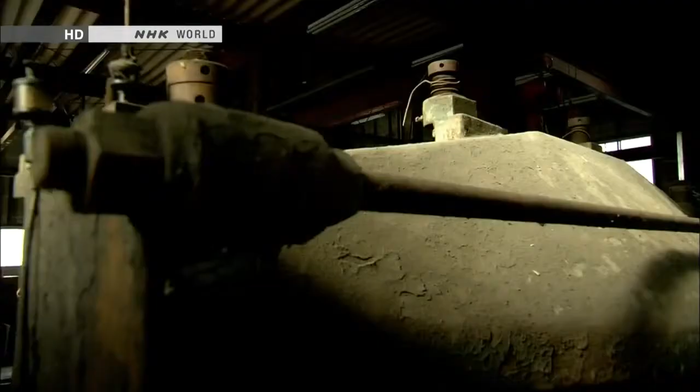The future is just around the corner. In a workshop near Mount Fuji, a curious being has appeared. It's 3.8 meters tall and weighs 4 tons. It is a giant humanoid robot named Kuratas.

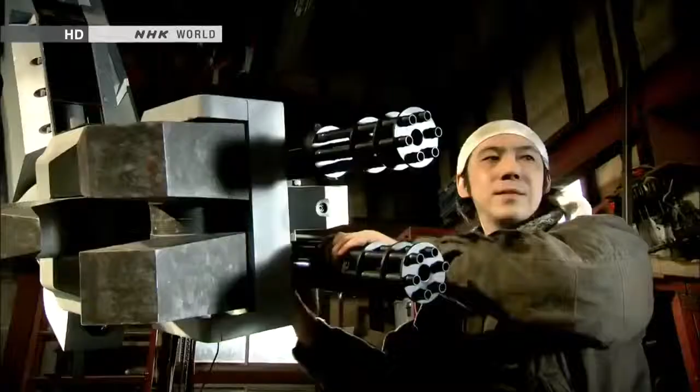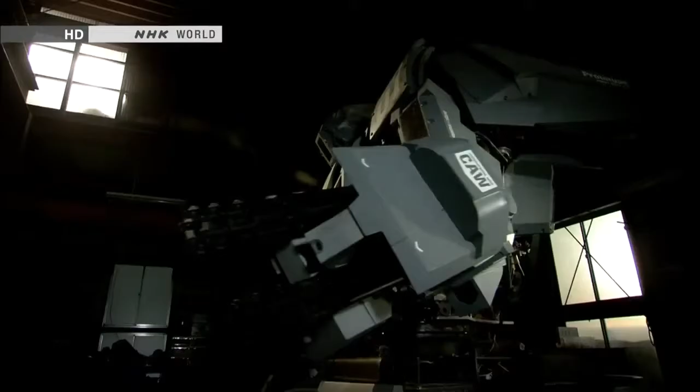Kuratas is a contemporary artist's creation. He holed up here for 2 years, building the robot with input from an expert. He calls Kuratas a work of art, but it's a sophisticated piece of machinery. A person seated inside can control the robot, move its limbs, and grab things. The artist says he was inspired by robots in science fiction tales and animation. That vision sustained him as he worked in solitude.

Things that were once unthinkable are becoming real. How will robots evolve? Well, military applications could be one option. They'll probably become more and more like humans. They could surpass us in strength and ability.

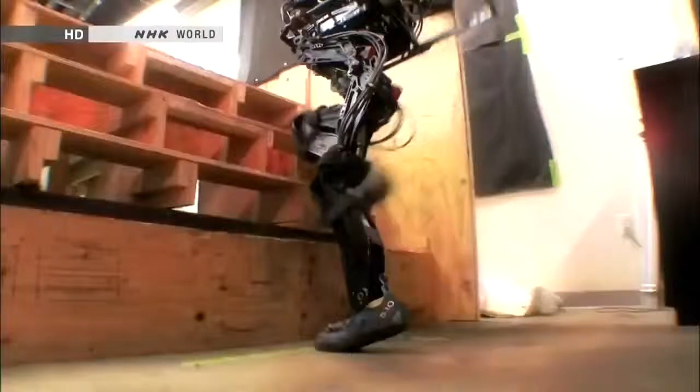People long dreamed of creating these extreme machines. Now, humanoid robots are here. They think like we do, move like we do, and even sacrifice themselves for us.

We want our robot to change society, because robots must be useful. Electronics and computing, progress in vision systems, there are many pieces of it. We will see much more capability continue to grow.

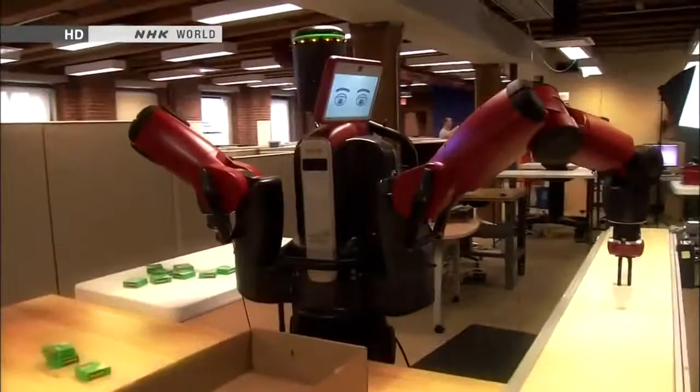Since the Industrial Revolution, people have entrusted some jobs to machines. But there may come a day when humanoid robots do much more complex jobs. Then what will people do? You'll see more and more robots doing things in society, whether it's manufacturing, service applications, or home healthcare applications. The key will be to skillfully divide labor between humans and humanoid robots.

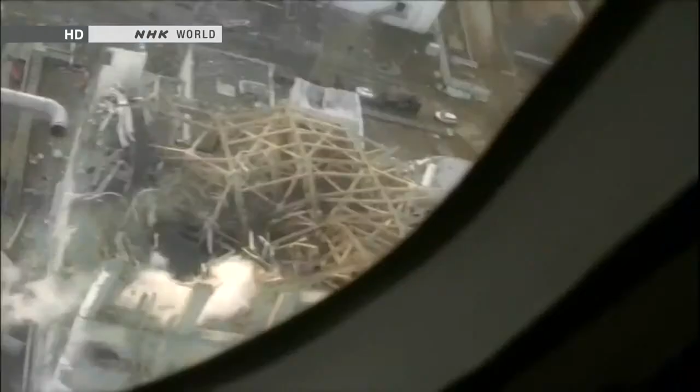The disaster that hit Japan in March 2011 accelerated efforts to develop robots with human traits. The Fukushima nuclear accident left people powerless. Robots can take over when things become dangerous. They can plow through rubble, climb ladders, even make repairs. People are turning to humanoid robots to handle all of these tasks.

We're eager to launch it soon to end the crisis. By joining forces, we can make a truly useful contribution. Only a humanoid could do it. The day will come when robots will really assist mankind.

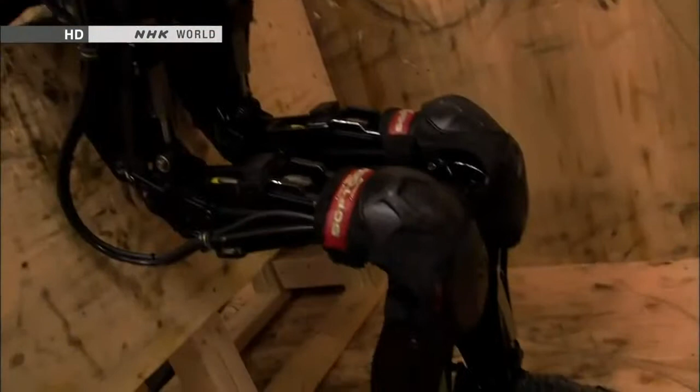The nuclear disaster in Japan sparked explosive advances in humanoids at the front line of robotics development. This program explores the future that's fast approaching.

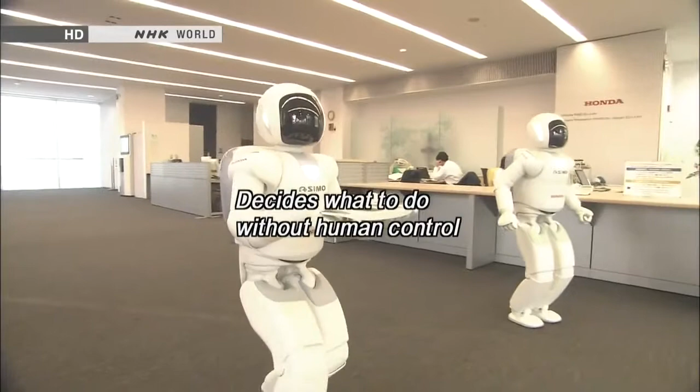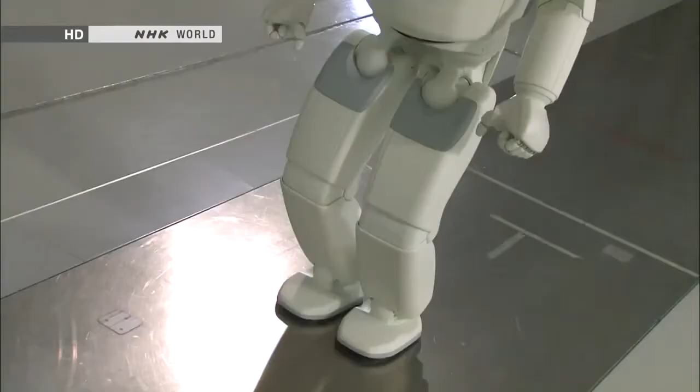Asimo was created by Honda's research and development subsidiary. We were allowed to film their top-secret robotics laboratory. Japan is a worldwide leader in the development of humanoid robots. Asimo is the country's crowning achievement. Engineers continue to make improvements.

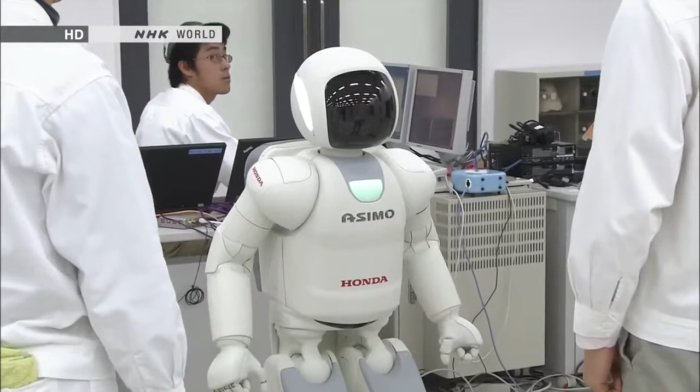Asimo's most innovative feature is its advanced intelligence. The robot can think and act on its own without human intervention. That's made possible by sensors that replicate our 5 senses.

Asimo's head contains 8 microphones. It uses them to listen and engage in conversation.

2 cameras work as eyes. They can detect humans and use stored data to identify them.

A facial recognition program. I don't think so. Please cover your face.

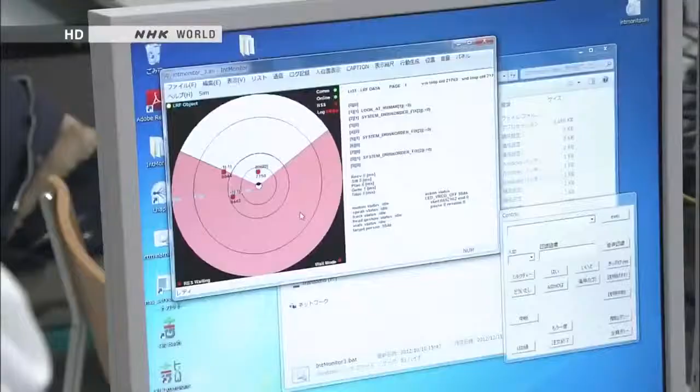Asimo's artificial intelligence analyzes a vast array of information. That's how it understands people's requests and takes appropriate actions.

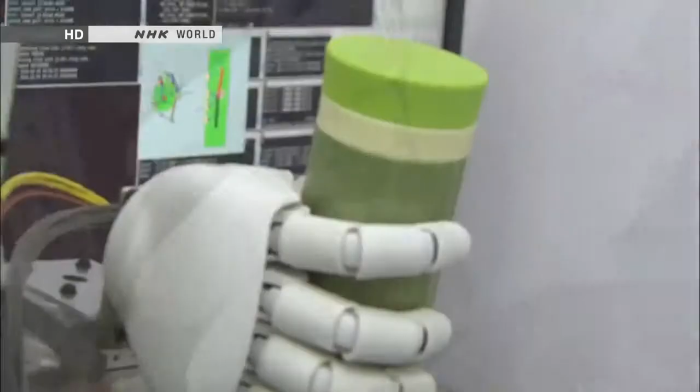Asimo also has a sophisticated sense of touch. Its fingers can make subtle movements, like a person's. Sensors are embedded in the fingertips, too. They can gauge the hardness of an object, like human fingers do.

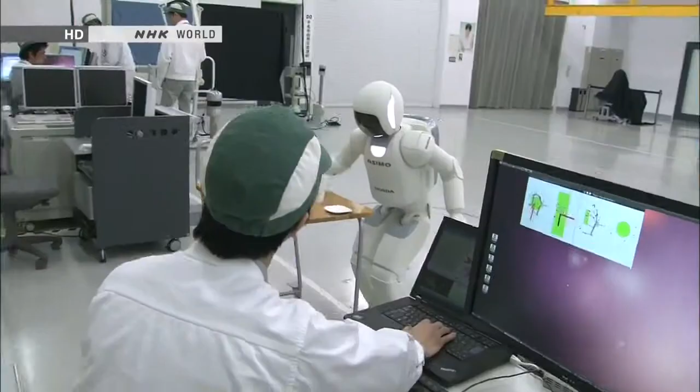Most robots use a fixed amount of strength to grab things. But Asimo exerts more power to open a tightly sealed water bottle and less when holding a paper cup. Its artificial intelligence uses information from the fingertip sensors to adjust the grip.

The developer's ultimate goal is for Asimo to be a valuable partner that coexists with humans.

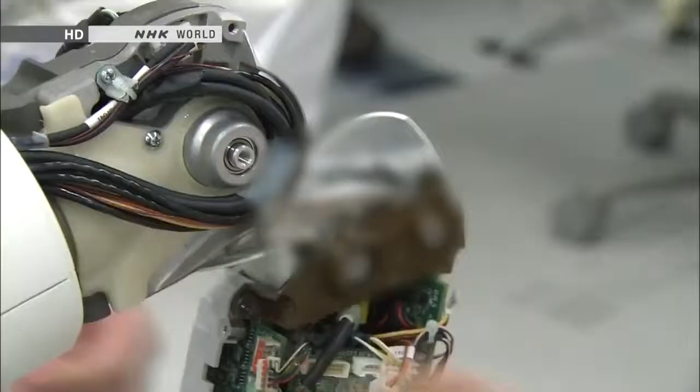The engineers who created Asimo all grew up watching animated shows about robots, such as Astro Boy, Doraemon, and Gundam. They dreamed of someday making their own. Satoshi Shigemi is the development team's leader. He has been designing robots for the past 16 years.

From the beginning, we wanted to design a robot that could help people. To realize that dream, we're constantly asking ourselves, what kind of robot would be able to change society, make people happy, and make life easier for people around the world? Our idea is to create a robot that will change how people live. We're working through the technological issues, one by one, in order to reach that goal.

Asimo's advanced physical capabilities are revolutionary. The robot can walk and run. It can reach speeds of up to 9 kilometers an hour.

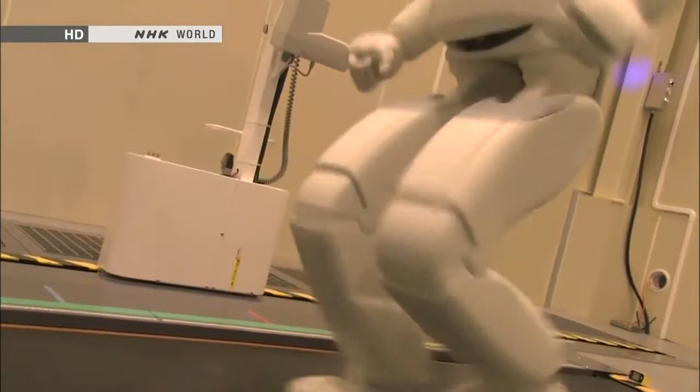For robots, walking is much easier than running. When running, both feet momentarily leave the ground. Balancing in mid-air is no easy task.

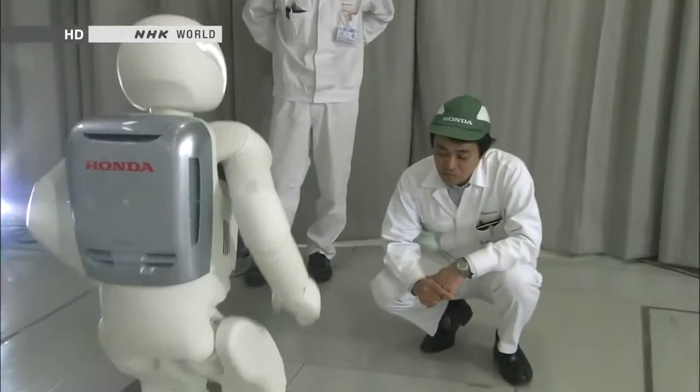Maintaining posture while jumping or floating in the air was a major technological breakthrough. Asimo leans its upper body slightly forward to maintain overall balance. It goes forward straight in the air.

Sensors in Asimo's waist measure the robot's angle. It leans slightly to compensate, forward or back, side to side. That's how it stays perfectly balanced in the air.

Asimo has been evolving ever since development began in 1986, much like a growing child. But something happened that made researchers realize Asimo's real-world limitations.

It was the accident at Tokyo Electric Power Company's Fukushima Daiichi nuclear plant. The damaged reactors released radioactive substances, making it difficult for humans to deal with the crisis. People needed something that could confront the dangers and bring the plant under control.

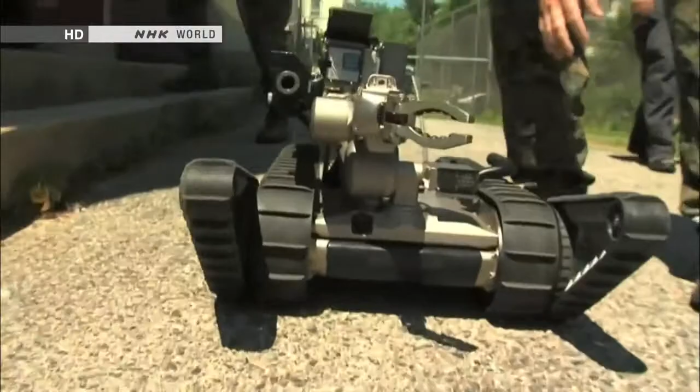Robots. Japanese officials sent a request for robots developed by the US military. The robots were sent to Fukushima in April 2011. They recorded images inside the damaged reactors.

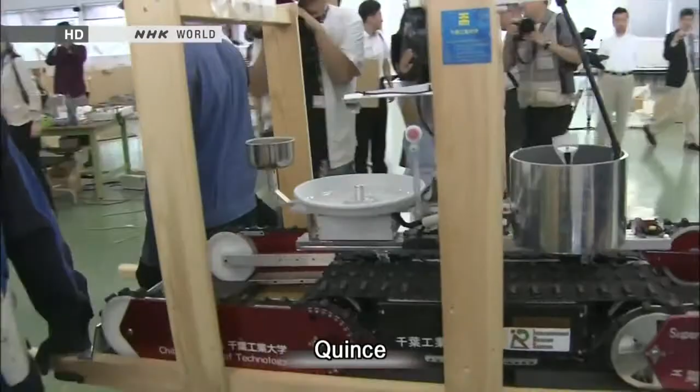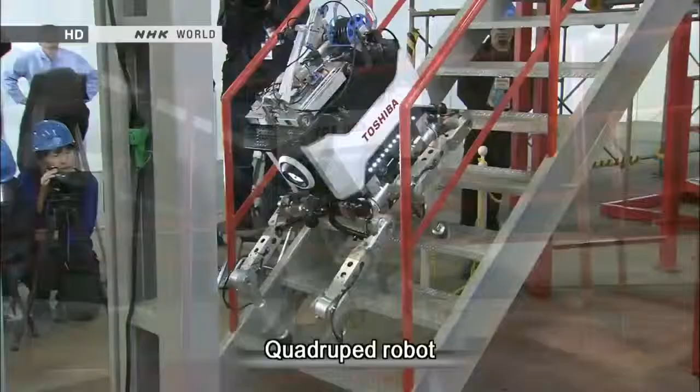Since then, a variety of Japanese robots have been enlisted as well. Robots have proven to be useful, but 2 years after the accident, they're only used for inspections. They're not able to do all the work of humans.

What about Asimo? Right after the disaster, people flooded Honda with phone calls and emails asking the company to send Asimo to the Fukushima plant.

But Asimo wasn't up to the task. It could move nimbly over an office floor and other flat surfaces, but large vertical gaps and obstacles were a different story.

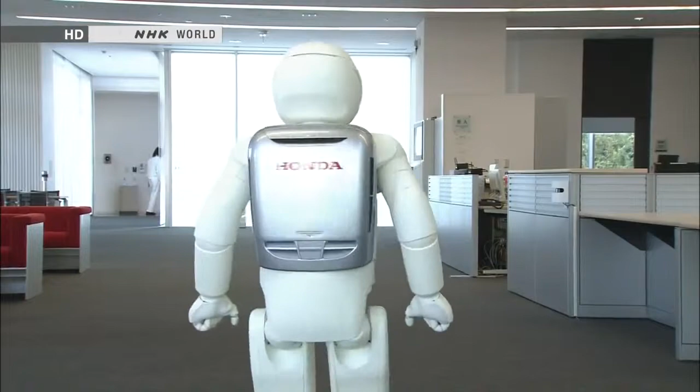We heard from many customers. We ourselves regretted that Asimo couldn't be of help. It was obvious that the Asimo we had built wasn't ready for real-life action. We realized right away that we needed to make something different. Something new that could offer immediate assistance.

Honda wasted no time. Company officials offered to create a robot free of charge to assist TEPCO in the recovery. TEPCO accepted. Officials asked for a robot that could open or close valves inside the nuclear plant.

We wanted to flush out radioactive materials that remained inside the pipes and bring down radiation levels in the facility. That was our first goal. Unless we opened or closed the valves, the area would remain highly radioactive, and that would prevent workers from entering the facility, and impact the entire decommissioning schedule.

How many valves are there? Each unit has from several thousand to tens of thousands of them.

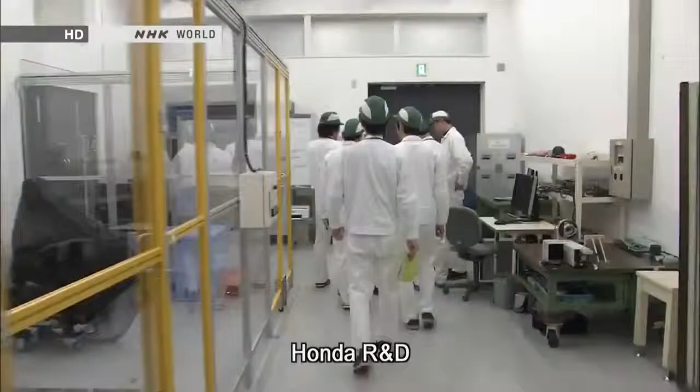In July 2011, 4 months after the accident, Honda began designing a robot for use at the nuclear plant. Members of the Asimo team were put in charge of the project. A humanoid robot would take too long to build, so engineers focused on making a robot specifically for operating valves.

Asimo was crucial to their efforts. Its ankles employ advanced balancing technology. Developers reasoned that using it would allow the new robot to work inside rubble-filled reactor buildings.

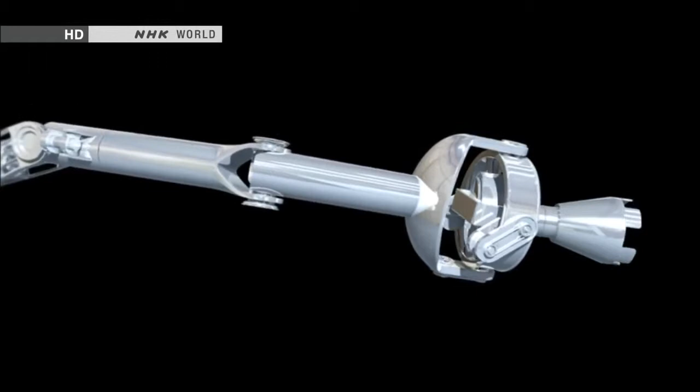The team worked exceptionally fast, completing a prototype in just 4 months. They turned Asimo's leg into an arm for operating the valves. Even when the base moves, the arm remains steady. So far, so good.

Officials from TEPCO evaluated the prototype at the National Institute of Advanced Industrial Science and Technology. The government-backed group for cutting-edge research contributed to the development effort.

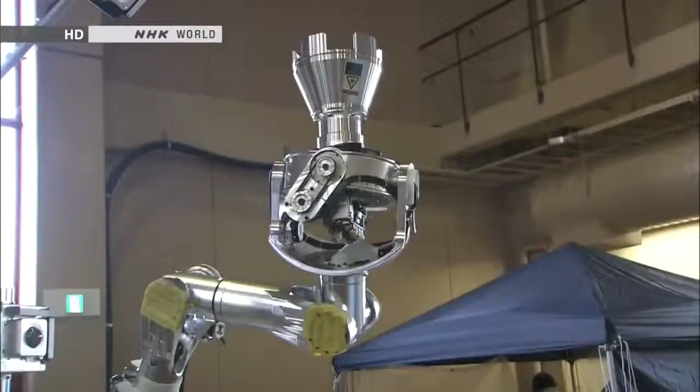A TEPCO official couldn't take his eyes off the robot's movements. We may be quite demanding. That's okay. We might be quite direct. The test is designed to replicate conditions inside the nuclear plant.

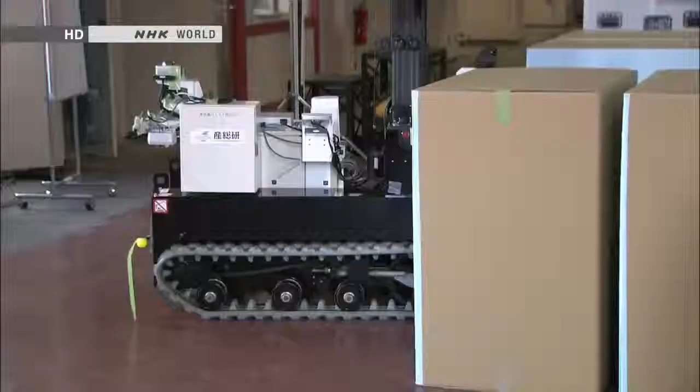The robotic arm is remote controlled. Testers send the arm toward one of the valves. There are a number of unknowns, including the condition of the valves. They may have rusted since the accident. A valve might break if the robot applies too much force, or it might not budge at all.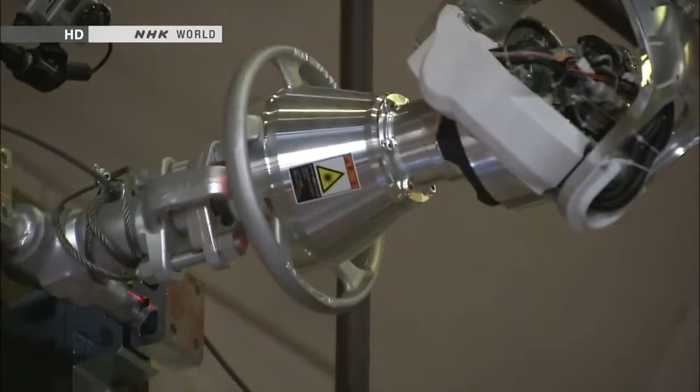The robot uses just the right amount of force and turns the valve on the first try. It's passed the test. This robot can do more than inspections. It could help in the recovery effort.

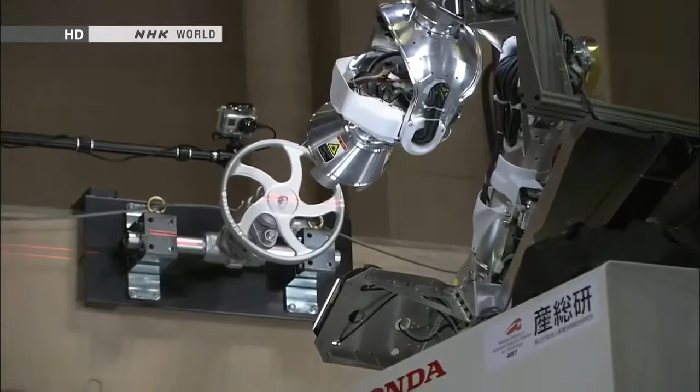From what we've seen, the robot seems near perfect. We want to use it as soon as the need arises. It's important that we quickly do what we can to make that possible.

The Fukushima accident also encouraged U.S. developers to design emergency response robots. Department of Defense officials have spearheaded the effort. Before, they had shown little interest in humanoid robots. Now, they view them as vital for disaster response.

The architect of the new strategy is Gill Pratt of DARPA. He oversees funding for leading-edge research at the Department of Defense.

There are many aspects of disaster response in Fukushima that inspire people in robotics to work on new capabilities. If they were able to take action during those first 24 hours, then the first reactor maybe would not have blown up in an environment that is too dangerous for a person to do.

What's important to us is that the robot is compatible with human environments, compatible with human tools, and also compatible with human operators without special training. As a result of that, the easiest form that comes to mind is the human form. DARPA is backing the development of a humanoid robot for catastrophes, such as nuclear power plant accidents.

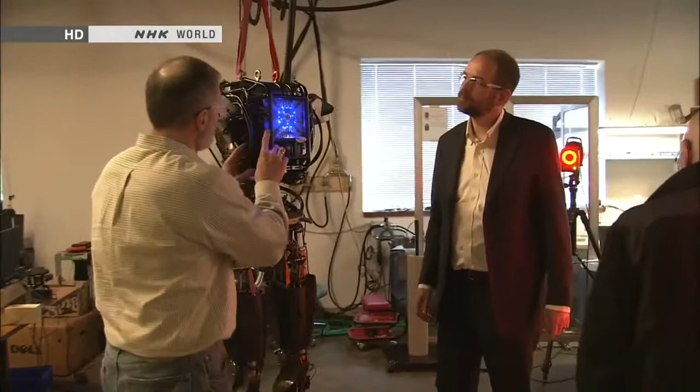This is the first American-made humanoid robot for disaster response. It's called Atlas. Before, U.S. designers had focused on robots with specialized functions.

Why the sudden interest in humanoid robots? Traveling over debris, prying open valves, using tools for repairs - performing multiple tasks like these is impossible for specialized robots. Crises also require robots that can navigate doors and stairs. Humanoid robots are ideally suited for such situations.

Tests of this prototype were going smoothly. It can easily climb stairs and jump from a height of nearly 1 meter. It can negotiate obstacles using its arms and legs. It can already handle more demanding environments than Asimo can.

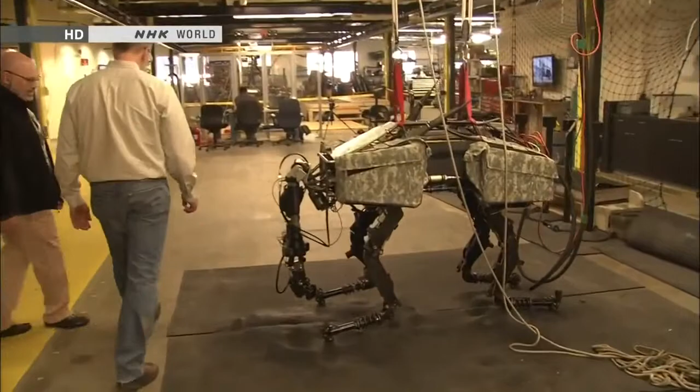Atlas is loaded with technologies originally designed for military robots. A quadruped robot called Cheetah can race through a battlefield at 50 kilometers an hour. LS-3 is for transport, it can carry heavy supplies for soldiers.

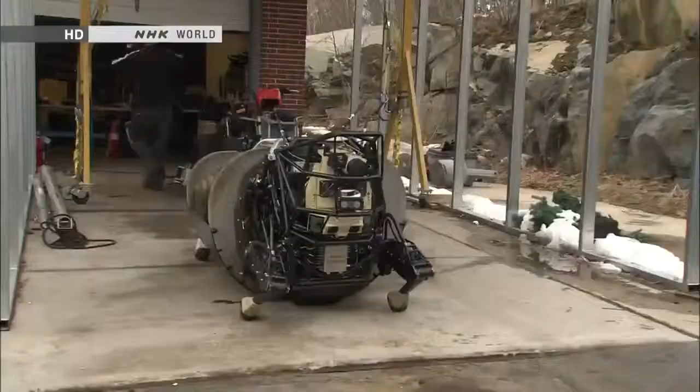The ferocious-looking robot gets its strength from a powerful hydraulic drive system. A hydraulic device can be small, yet quite strong. The black cables convey hydraulic power to the legs, generating the brute force required for harsh conditions on the battlefield.

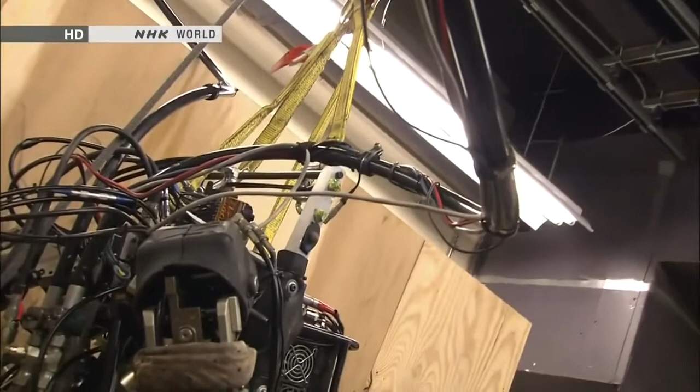A web of hydraulic cables covers Atlas's body. They form a muscular suit of armor for clearing debris.

Another important technology comes from military robot engineering. This machine's joints have a wide range of motion, allowing for flexibility that humans can't achieve. Atlas's joints are capable of moving in 28 different ways. Atlas can crawl through narrow spaces and withstand sudden shocks.

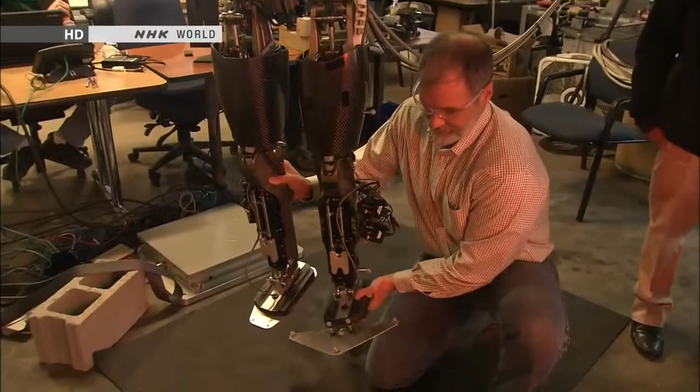But then we have the knee. This has 3 in the hip, just like us. This way, and then this way. I am very impressed with the number of degrees of freedom. It will be able to do these human-compatible tasks without a lot of the limitations that other robots have.

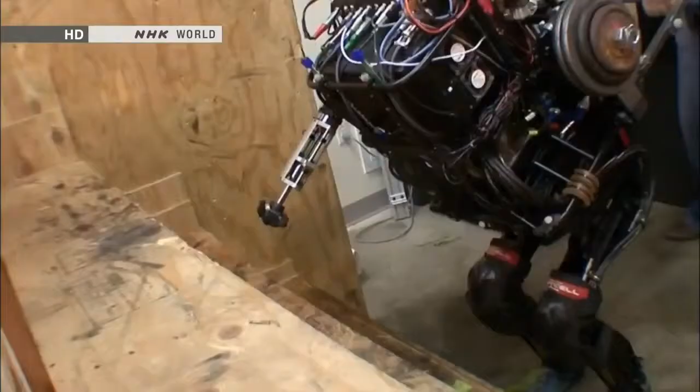Engineers will combine Atlas's rugged body with sophisticated artificial intelligence that's almost near completion. They aim to complete the robot by December of next year.

One reason you see humanoid robots is because there's some people working who are really interested in robots as an entertainment thing or as a performance thing. I think that's different. We're much more interested in basic capabilities for emergency response, rescue. So I don't think Asimo has been designed to do those things yet.

U.S. engineers stepped up their efforts to develop humanoid robots after the nuclear accident in Japan. Japanese researchers are embracing the same mission.

In November 2012, robot engineers from around the world gathered in Osaka for an international conference on humanoids. Gill Pratt from DARPA was one of the participants.

He came to invite engineers to join a project sponsored by the U.S. Defense Department. March 11th - after 24 hours, if only a robot had been there to go and open that valve, the entire disaster could have been averted. But we didn't have one, and furthermore, we didn't have anyone that could do the job. So shortly afterwards, we actually started planning the DARPA Robotics Challenge.

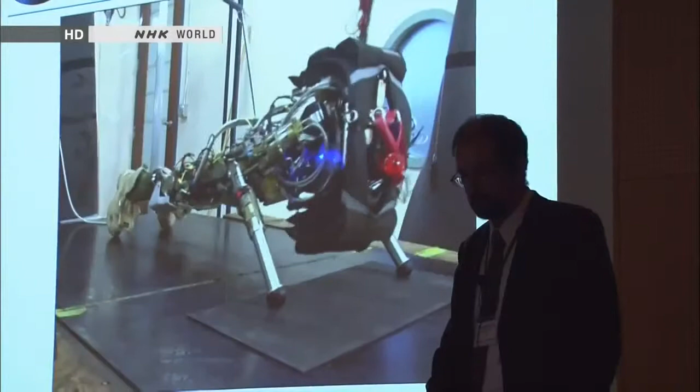They have 2 degrees of freedom, not 1. The Robotics Challenge is a competition to develop emergency response robots for major disasters like Japan's.

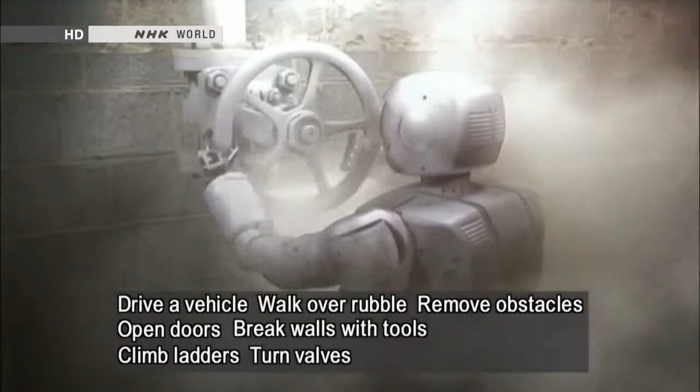The challenge consists of 8 tasks: driving a vehicle to approach a disaster site, walking over rubble, removing obstacles, opening doors, using tools to break down walls, climbing ladders, turning valves, and making repairs.

A single robot must complete all 8 tasks. The development period is 2 years. DARPA will provide contestants with funding of up to $4 million.

DARPA has received over 100 proposals from research groups worldwide. They include renowned organizations like NASA and MIT. Japan is at the forefront of humanoid robotics engineering, yet its researchers hesitated to throw their hats into the ring.

So actually, to me, it's difficult not to see that some of the results of DRC are going to be used to advance, as you say, advanced military technology. The DRC is about developing robots that I believe wholeheartedly are completely impractical for military purposes, for offensive military purposes.

Will the technology that we come up with find its way into military systems? Probably yes. But I guarantee you that if you work on a robot for healthcare, there's a chance that that technology will also find its way into military systems.

The members of one Japanese research institution wanted to take part in the competition.

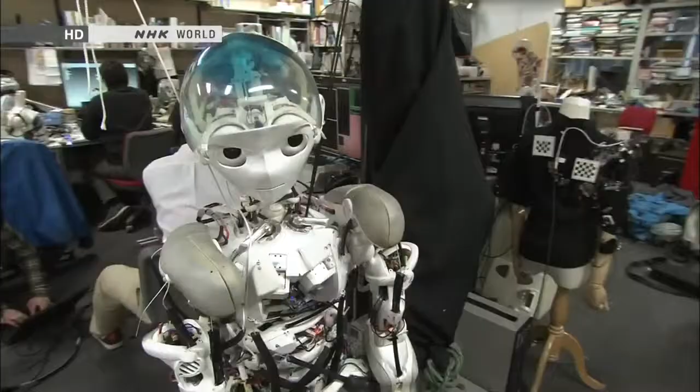They worked at the University of Tokyo's robotics lab. Researchers there, along with those at Honda, are global leaders in robotics engineering. But they faced a major obstacle to competing: the university bans military-funded research.

Three researchers made a decision. They told the university they were leaving, then decided to set up a venture company and enter the DARPA Robotics Challenge. They couldn't shake the feeling that they should leave their quiet university lab and help resolve the nuclear crisis.

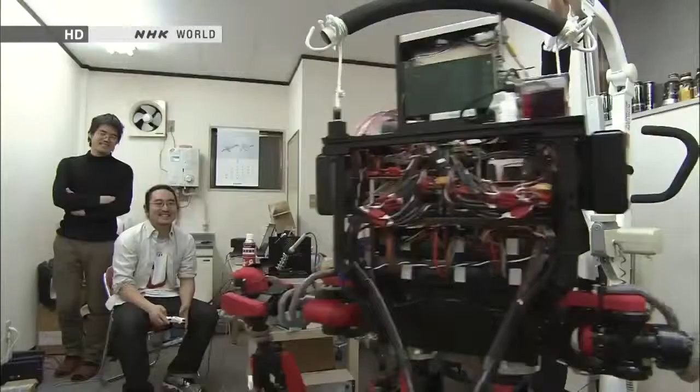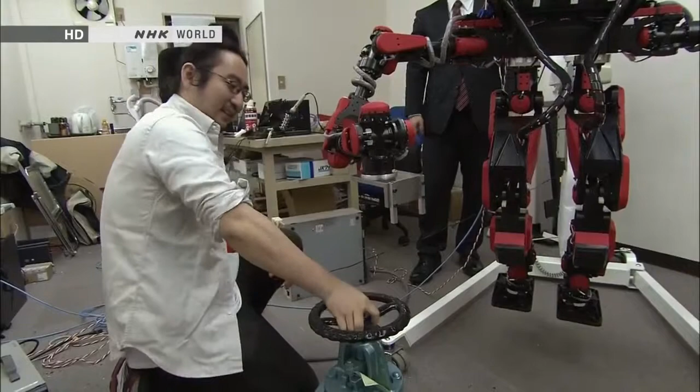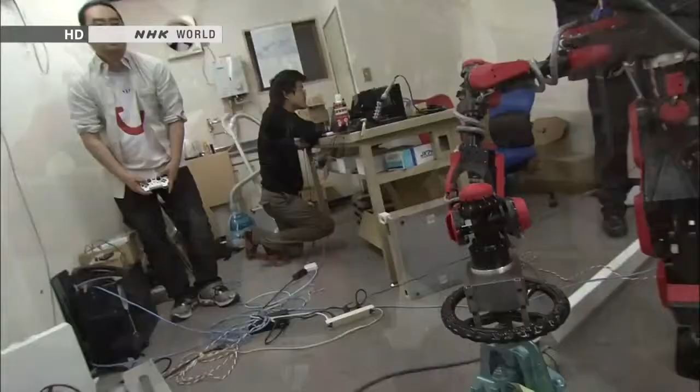Six months after launching their venture, the team had just completed a prototype with help from university graduates. Its long arms can exert 10 times more force than those of conventional humanoid robots. It's too tight to turn with one hand. It can easily turn a valve that's too tight for a person to turn. The strong force comes from a large electric current that pushes the motors to their maximum limits.

A reddish fluid circulates through the robot's body. The fluid serves as a coolant that keeps the motors from overheating. The cooling system should enable the robot to perform hours of grueling work at disaster sites.

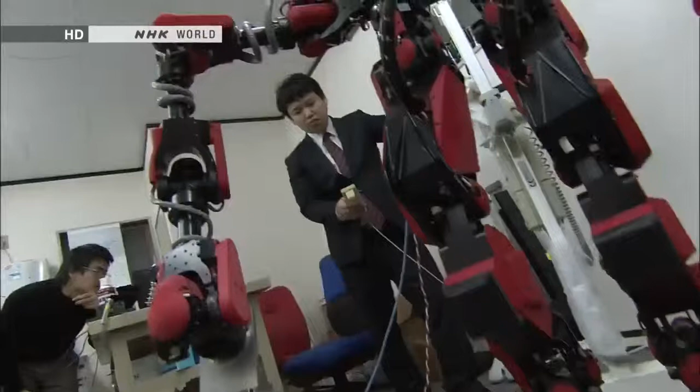The time has now come for the developers to apply their years of research to the real world. A nuclear crisis has happened here in Japan. Radiation is escaping. Researchers in every field must wonder at least once if the technology they've been working on could help resolve the crisis. By joining forces, we can make a truly useful contribution. It's with this in mind that we decided to enter the competition.

One country is quickly catching up with Japan in humanoid robotics: South Korea. KAIST is a government-funded lab for the advancement of science and technology. Researchers there were among the first to express interest in DARPA's robotics challenge.

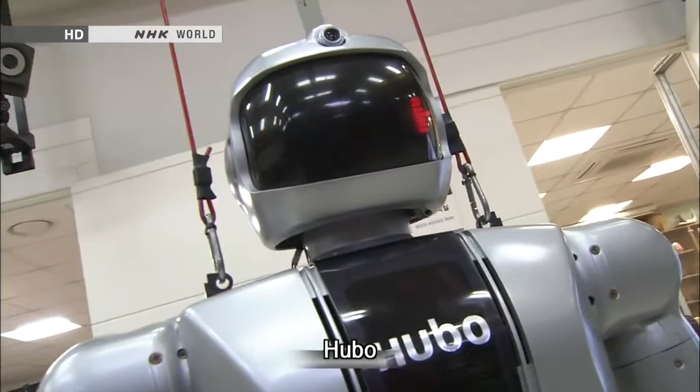This humanoid robot is called Hubo. It's modeled on Asimo, which Honda spent 14 years developing. Hubo was built in just 5 years. Hubo deftly manipulates its hands, and it's also good at dancing. Its moves look just like Asimo's.

Hubo has been undergoing a major upgrade ahead of the competition. It can now bend backward at the waist while walking to handle all kinds of environments. It can quickly pick up tools. The tests were going well.

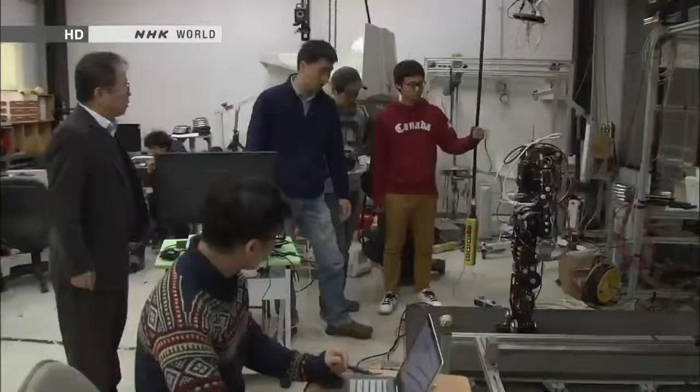People have always compared Hubo to Asimo. Engineers now had a strategy to get ahead of the Japanese developers. They decided to publish certain details about Hubo's design and pursue joint development with researchers at other institutions. One could say that this space inside Hubo's chest captures the heart of their thinking.

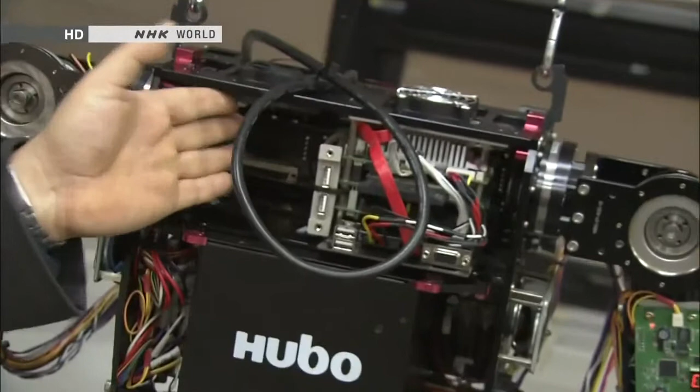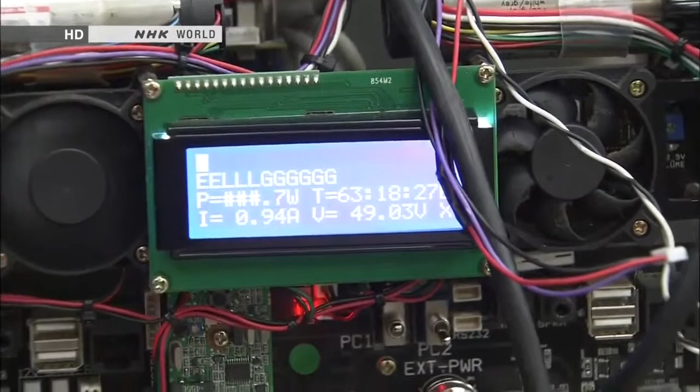It's empty now, but this is where artificial intelligence will be installed. It's removable. Hubo does not yet possess artificial intelligence. Its motions are as sophisticated as Asimo's, but Hubo's movements are all pre-programmed. U.S. universities that lead research into artificial intelligence will develop a brain for Hubo.

The stage has been set for a joint U.S.-South Korean team to compete in the DARPA Robotics Challenge. Sharing is the key to making technological advancements. That's true in South Korea and in other places too. Research shouldn't be confined to one place. People developing humanoid robots elsewhere are too close-minded.

Researchers at Honda were also invited to enter DARPA's competition, but they declined. Their energies were focused on designing a robot to tackle Japan's nuclear crisis.

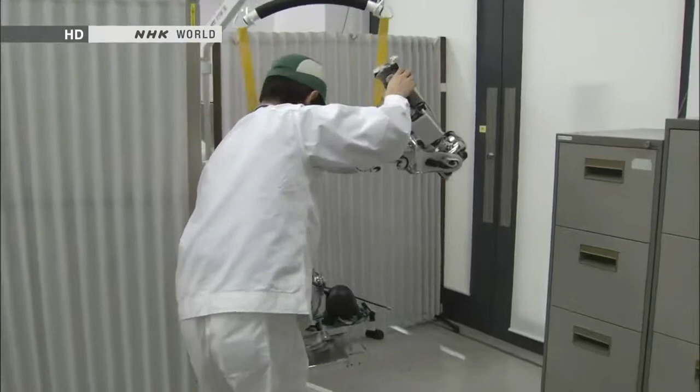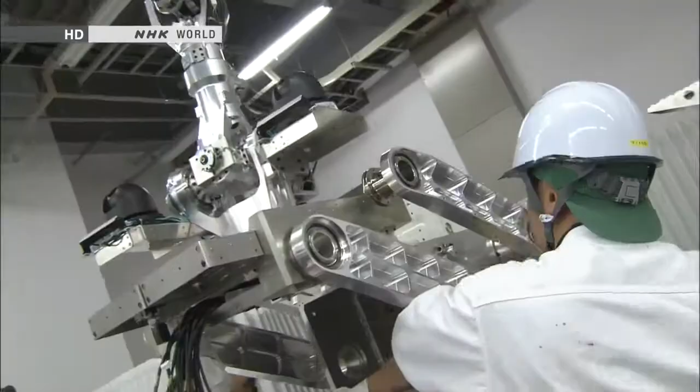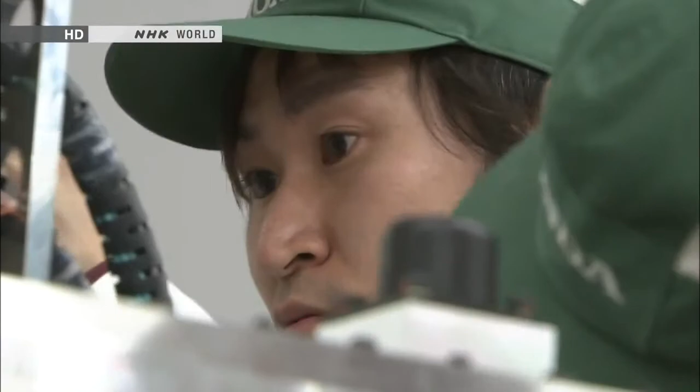Nearly a year has passed since Honda's robotic arm passed evaluation tests, but the device has yet to be deployed to the nuclear disaster site. That's because officials at TEPCO requested a change in specifications. Engineers have replaced the valve-turning hand at the end of the arm with a camera. TEPCO had changed its plan. Officials decided to put priority on assessing conditions inside the plant's facilities. They said it was too early to have robots work on valves.

There wasn't even a recovery plan in place when we were working out the valve manipulation tasks. Confusion also prevailed at the site. We were expecting valve work to begin 2 to 3 years after the disaster, but the timing has ended up being later than what we'd assumed one month into the crisis.

The robotic arm will soon be sent to the accident site. It will provide the first images filmed from high up. The robotic arm was not the end of Honda's efforts. Its engineers had another secret mission.

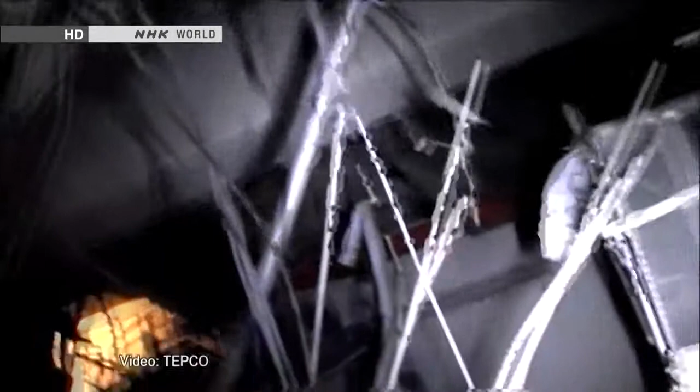They would develop a new humanoid robot, an updated version of Asimo for use in disasters. The site where the Fukushima disaster took place is dark and off-limits to humans. Only a humanoid robot with both intelligence and motor skills could climb over the debris, get to the accident site, and perform the work of people. In other words, a robot like Asimo.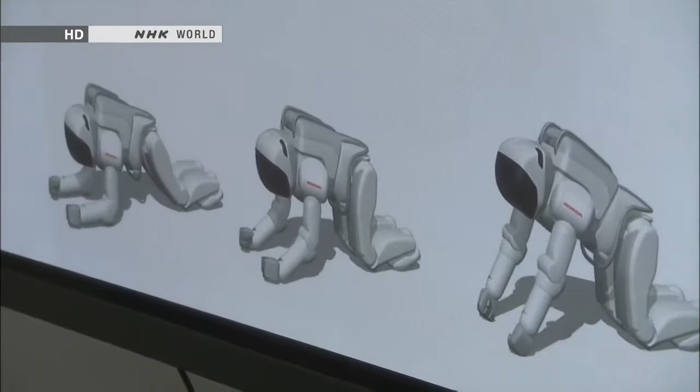Let's use our skills to make a humanoid robot that can tackle disasters. Asimo's engineers were united by this idea. The robot they envisioned would not only walk, but also use its arms to crawl. It would use every means possible to reach its destination. A dramatic update would be necessary.

A disaster reduction robot would be useless if it couldn't get to the site. It's important to get to the scene no matter what. Disasters create all kinds of debris that crumbles easily or breaks when stepped on. It's because it's dangerous that robots replace humans. That's what makes them valuable. A robot that couldn't get to the scene would be totally useless.

Honda's engineers began developing robots in 1986 with the goal of making people happy. 27 years of research is now being put to the test. As we saw in the Fukushima Daiichi crisis, the bottom line is that robots can stand in for humans in places that we can't go to or that are too dangerous. I am committed to delivering what's needed, when needed, in the shortest amount of time.

The accident in Fukushima spurred the development of humanoid robots around the world. The disaster also prompted people to question the roles of humans.

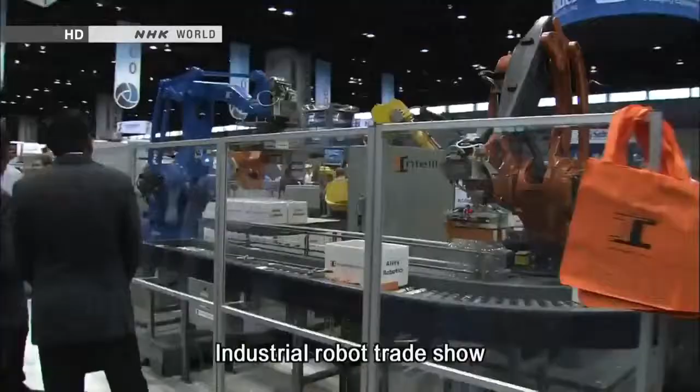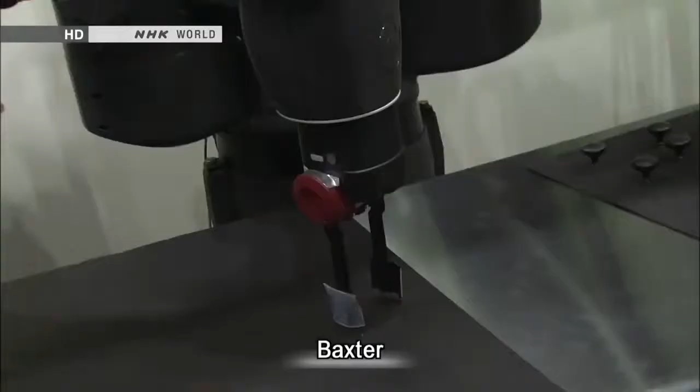One of the largest trade fairs featuring industrial robots took place in January. Global manufacturers displayed their latest models. Companies are developing more and more two-armed humanoids for industrial use. One new product at the event caught a lot of people's attention. Baxter was created by the inventor of a best-selling cleaning robot. It's equipped with sophisticated artificial intelligence.

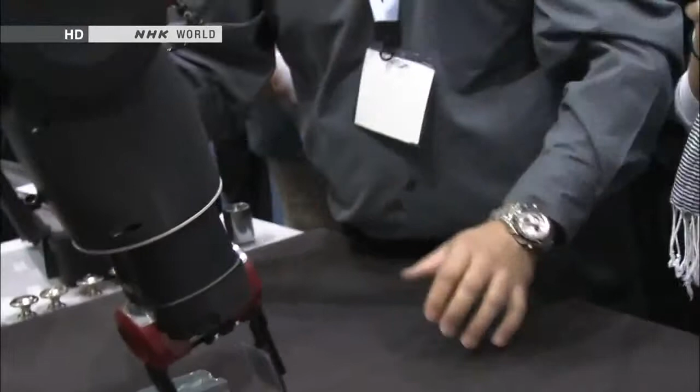Baxter's most unusual feature is its ability to master a task in a matter of 5 minutes. All that's required is step-by-step manual instruction. No complicated programming is needed.

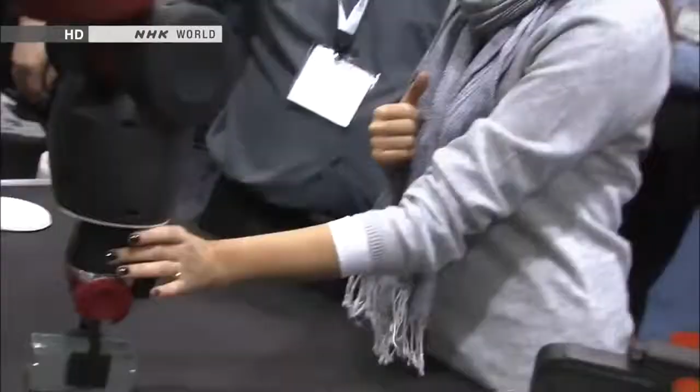Let's pick up this part. So you bring the arm to the part. Yep, just like that. So we have the part. Close the grasp. Yep. Grab the arm and bring it to the table.

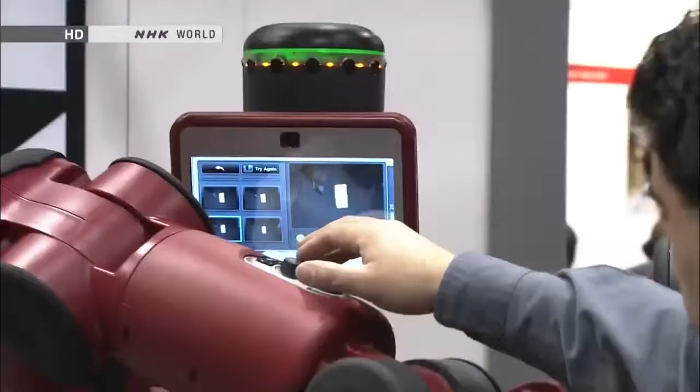The expression of the face on the LCD screen shows whether or not the robot has understood the task.

Baxter costs $22,000, a bargain for a humanoid robot. The maker says buyers can recoup their investment in several months and slash labor costs.

I'm very impressed with it. I work for a small manufacturing company, and we have some older employees who are looking to retire. There's some tasks that Baxter could do for us very effectively. Plus, it would be cheaper than employing a person. It's not going to get tired, it's not going to need to stop. It'll keep running while everybody else is taking their lunch.

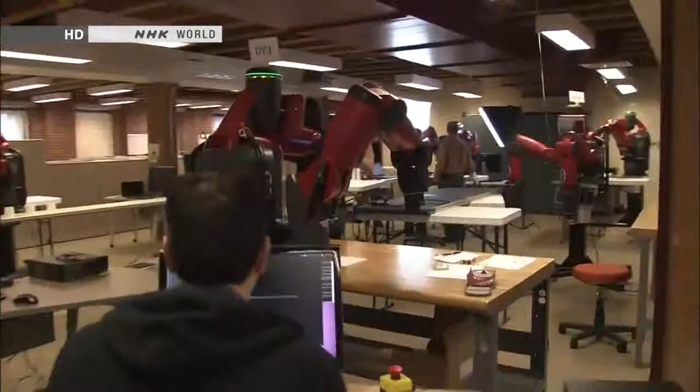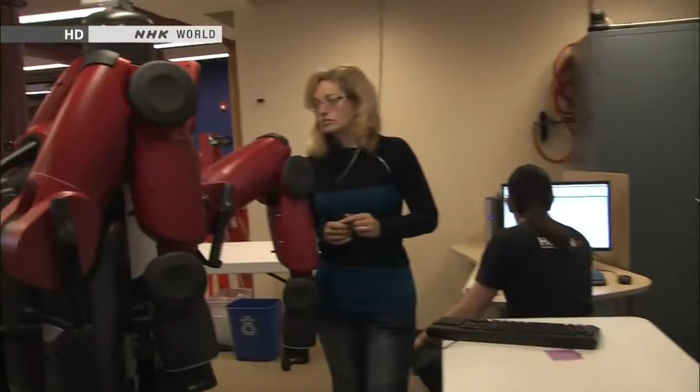The Boston-based manufacturer has a flood of back orders. Officials say someday Baxter will work at places like coffee shops, taking orders and grilling burgers. Eventually, they expect to have 500,000 U.S. customers.

Today we're focused on manufacturing, and there's a very big opportunity in manufacturing, but there's lots of other places that a robot like Baxter could go. We had the Industrial Revolution at the turn of the last century. We've just gone through the computer revolution, effectively at the turn of the most recent end of the century. We're now into the robot revolution.

Will people and robots someday compete for jobs?

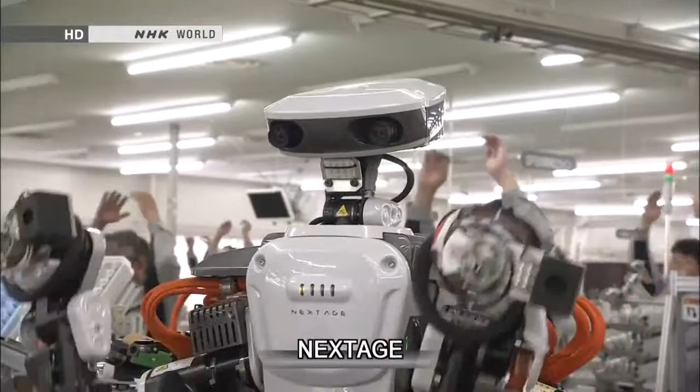At 8:30 one morning, a group of new employees takes part in daily morning exercises. They are 13 humanoid workers called NEXTAGE. This company began using the robots in earnest last year. They have 2 eyes and are just like humans. They're cute. This factory manufactures money sorting machines for cash registers.

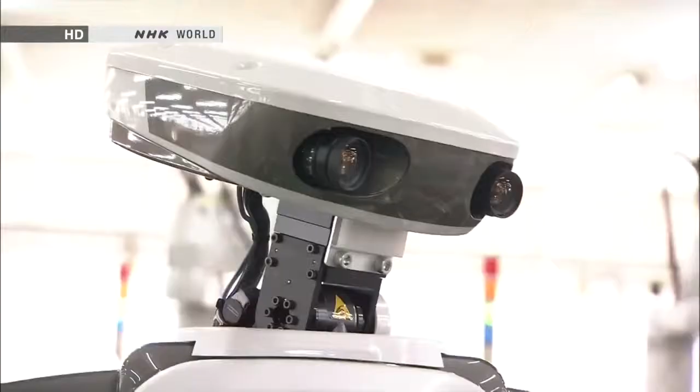The humanoids work on a production line that was previously manned entirely by humans. The robot visually confirms the parts set in place by a human worker. Then it begins its task.